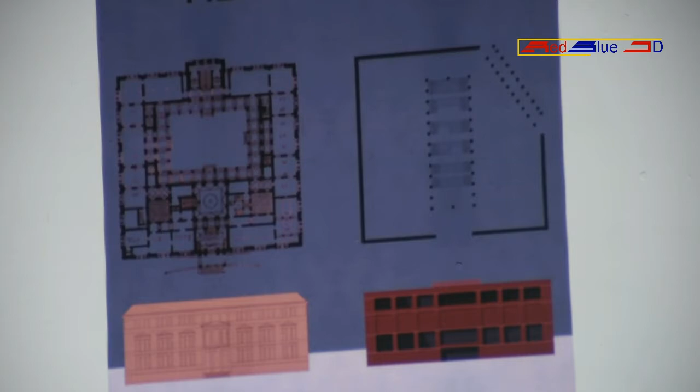So in terms of the urban context, we basically took this volume that the Martin Gropius gave us, and we copied this volume, except on this side because there's a street, so we'll talk about that later. You can see that in terms of the volume, the facade, and also the axis, we buddied up with this other building.

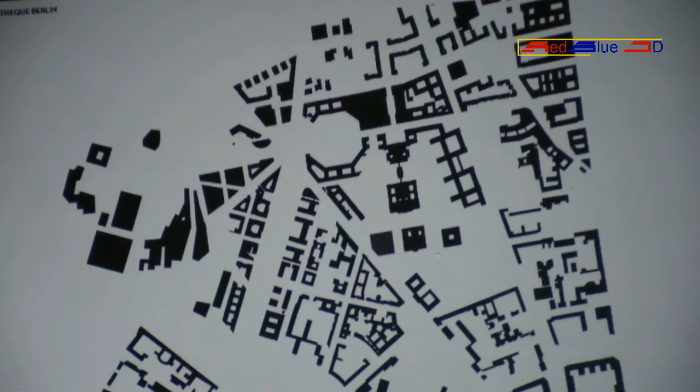So you can see it here, like in the plan. It was gray, but the little thing really in the middle, the kind of grayish purplish thing, that's our building. You can see that we took the axis that we had, and this other problem that we solved with that as well, because our plot has this triangle thing, which was also a challenge.

How do we handle that? Do we put a triangle? Do we make a front to that, or what do we do? So this is what we decided to do. We took the axis, we took the volume, we also took the height, so we really took the whole volume.

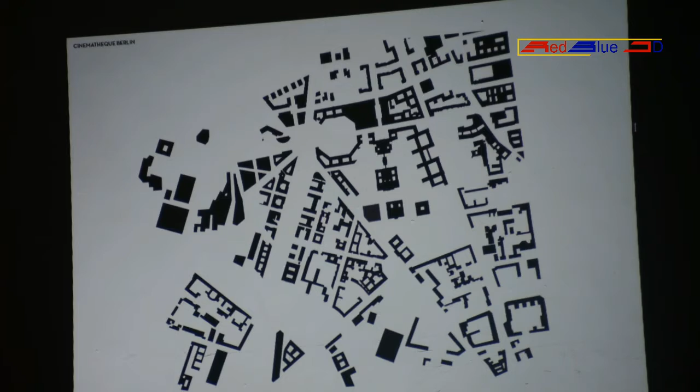And the only thing that happens is that the street kind of cuts our volume, so we had to react to that as well. I wonder if I should show the model first. So that's what it looks like when you go close.

In terms of what we had to bring together, this urban context, and then also the inner organization, with this huge hall that was inspiring us as a reference, we wanted to make that. It was given to us that we needed a foyer, and we said okay, we want to make this huge hall basically, and we put this huge hall in our building. How did we do this? What you can see here is that what you have in the columns is the hall.

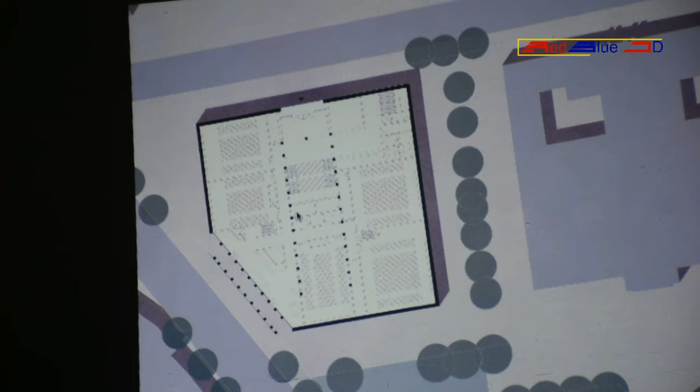I don't know, can you see some? I think I will explain more later on as well. I'm actually thinking maybe I should show the model first, because I think it'll be easier. You can see I don't use a Mac, so I don't know how to do it, so I will show you first.

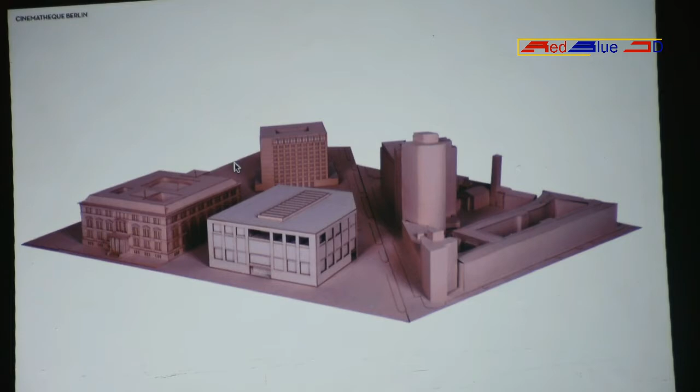So this is what it looks like from the outside. And then on the inside, okay, so we have the Martin Gropius, and this is our building, and you have a bit of the surroundings. And this is what it looks like, our hall on the inside.

So what we did basically is we took our building and we put this huge hall in it, and inside the hall we have this staircase, which does the circulation of all the different programs that are inside the building.

Actually, I didn't say what the program was. So the program was, you had a museum with exhibition space, you had office space. It was supposed to be also kind of temporary exposition space that can be turned into office space. And there's studios for the film students, and there was a restaurant, cafe, and museum shop. So really a lot of different things.

So for us it was like, okay, we have this foyer with the staircase that will organize these different programs and help bring it together. The staircase has small platforms, as you can see, which can be used to work, to exhibit things, and so on. You have small steps at the side, and in the middle bigger steps which are like to sit on, with platforms in between. So that was the idea.

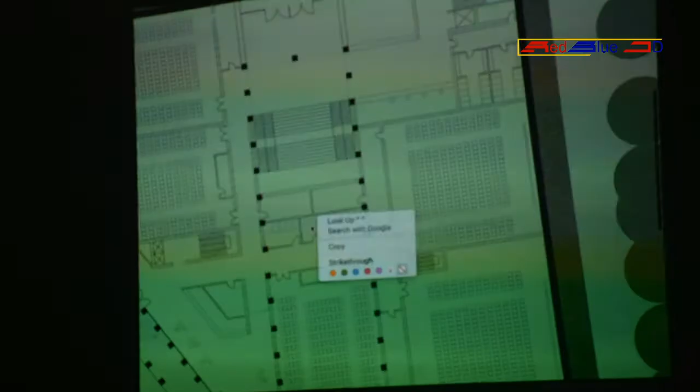So I will explain a bit more how this works. Can you see something? Kind of, right? Kind of.

So on the first floor you have the entrance, and then you have the hall where the staircase begins, and you have the whole cinema part, with these different auditoriums.

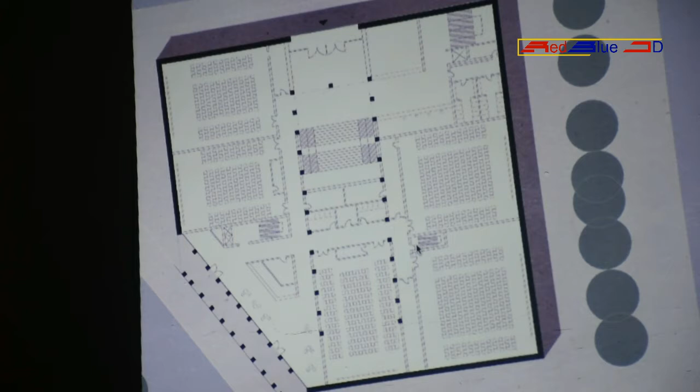I was talking about how we had to react to the street cutting our building. So what we did was, on this side we have another entrance, a smaller entrance for just the cinema part, because that might work also at night when the museum is closed, when the offices are closed. You have this kind of arcade that you can pass through to access the cinema part. That's all organized in this part, and also, as you'll see in the section, we put it into the floor a little bit because the cinema part needs a lot of height, and we didn't want to go higher than our neighbor.

So the neighbor was 23 meters, and we could not go on top of that. But at the same time, we needed to put a lot of stuff, and the museum space also had to be pretty high. So we solved this by really putting the cinema at the bottom and putting it slightly underground.

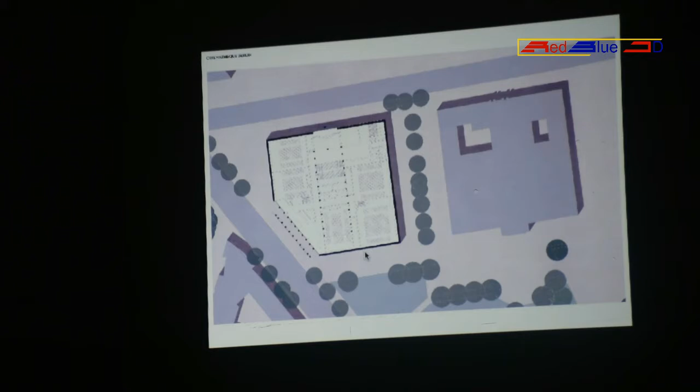Yeah, I'm really too stupid for this thing. There we go. Sorry.

So you can see I left it in German, I'm very sorry. You can see the other floors. Each time in the middle you have the staircase, and around it you organize the different programs.

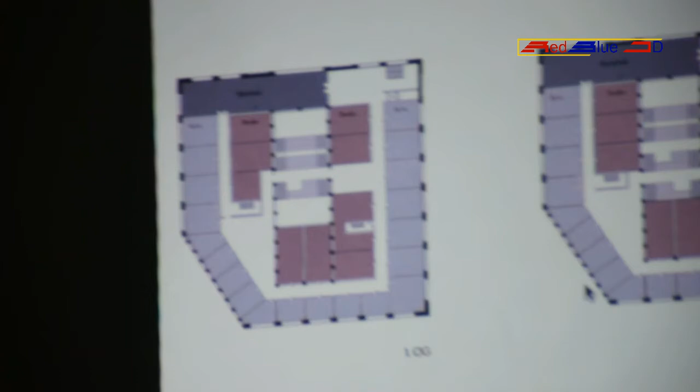So in this case again, we had the thing with the light: all the office space is around the facade because you need a lot of light there. Then in the middle you have the studios on the first and second floor, so there's two. The studios get some indirect light from the hall, but they don't have a facade. There's also a small library which goes over 2 levels. Then on the 3rd and 4th floor you have the exhibition space.

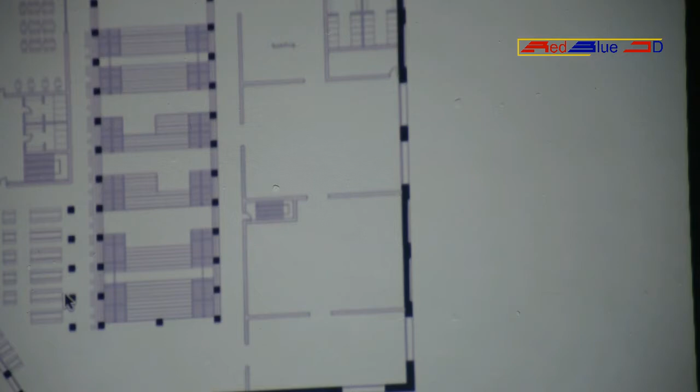That's here on the right. In this one, you can see this is the 4th floor, also the exhibition space on the right. On the left there's a cafe and a small restaurant, and they have a terrace—the restaurant has a terrace. You can also see the staircase in the middle, with this kind of gallery around the hallway.

I think you can see it in the section that this is our hall—you can kind of imagine the construction now with the grid. On this side it's very light, but you can see the projection wall. On the other side you have the staircase that you can sit on. You can also see that the cinema part is put into the ground, with different levels.

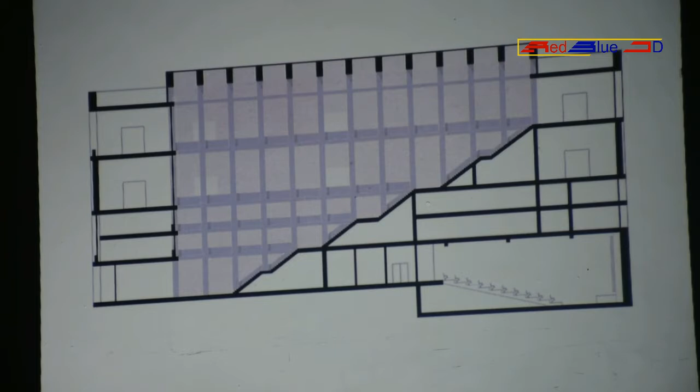So the first 2 floors are low, and the other floors are really high because the exhibition space had to be at least 6 meters high for exhibiting.

What I can show you here as well is that we put this grid underneath to organize things, and you'll see later in the facade too—basically we have 2 grids.

We have one for the facade and the outside, which is bigger, and then a smaller one in the hall, which is half of the big one, where the columns go up—where we have our cafe, and down on the ground floor you have the entrance for the cinema. You can see the grid is kind of going out, pushing out to the facade, because the idea was that since you cut our volume, you cut our facade, here you have the inside kind of coming to the outside.

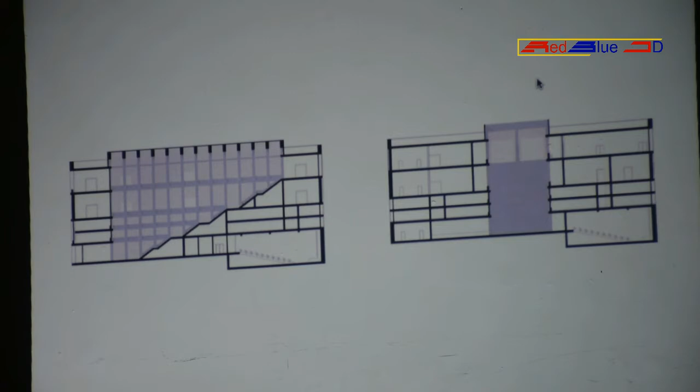So you can see the hall, and you can also see it from the outside because it's higher, like this little lantern coming out. I'm really sad I don't have the model, because I think it looks a lot nicer. But it's really orange.

This is the facade that we came up with. So you can see the grid, the big grid and the small grid, and you can also see the lantern of the hall coming out.

And you can see that where the cinemas are, it's kind of closed, because you don't need windows there, right? So you have this kind of base. That was another thing that was important to us, that we have this heavy volume - we want to give it something at the bottom, like a base to be on.

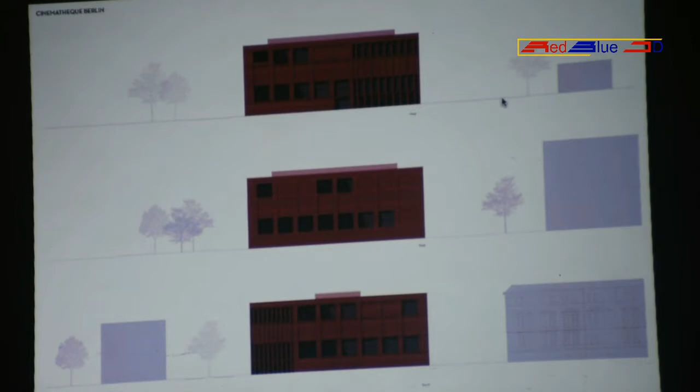And I will also show you how it's really inspired from this neighboring building again. It's a brick facade. Maybe we can show you best here. I cannot see that well, right? Can you see the lines on the left building? It's too small, no?

So this is the Martin Gropius building, and we tried to, like I said, we kind of copied, or we got inspired by it. You see, he has this base, and he has also these things that go around - in English, I'm not sure what you call that. So we took those; they are where our floor levels are, our ceilings basically, that are on the outside. And you can also see that the proportion of the windows and the entrance are the same - that it has a little bit more space on the side than between the windows. So we really studied the proportion of this and tried to learn from it.

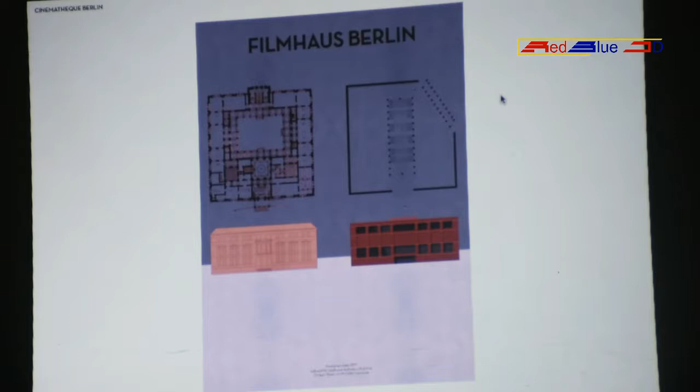Maybe here you can also see that we tried to do that. We have these fields that the lines basically made, and we either had windows, or we had blind windows that are pushed back a bit, but they're not a window, just a brick facade.

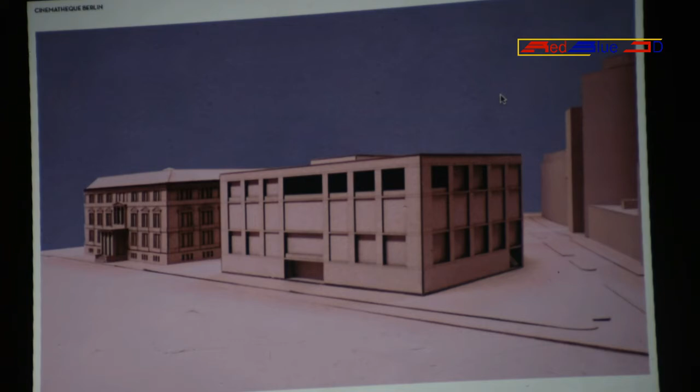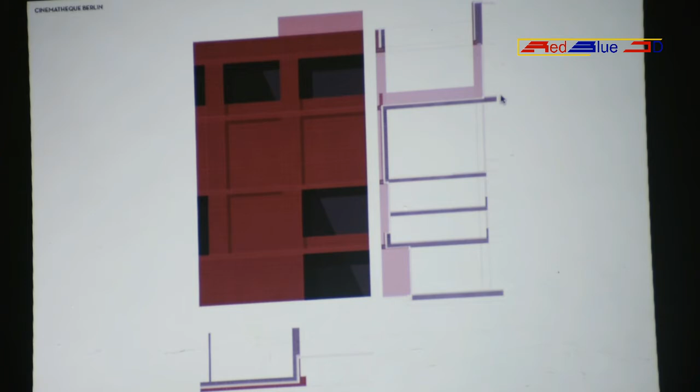You can see here, maybe again the model, which is where the photos come from. This is the model that we had, so that we could kind of open up the hall, and up there you can see how we were building it, up and up. This is just how the facade works - it was a double layer, basically. We had inside the structural part, the ventilation layer, and then the brick facade, which was not structural.

I think I talked a lot. Maybe you have questions, I hope I explained more or less. Yeah, thank you.

Is this a construction detail? Maybe we cannot see it properly. I think it's not that clear, but I can zoom in a little bit. It's just the structural part, and then the insulation - the concrete structure with the brick cladding. So exactly, it's just the darkest part that is structural.

So the year of construction of the building beside it is around 1,400? Yeah, something like that. So the project is beside a very old historical building that is 600 years old. A lot of the time, when you design in context like that, you have to be very aware of the responsibility of the new design and how it's going to relate with the context.

Do you have questions? Thank you for the presentation. Also, as she said, it's a nice approach to managed to harmonize the historical building and the design course. Most of the time it becomes challenging for students to adopt a modern design, and when you are designing in that context, it's a good approach how you manage to be in harmony with it. And go back on the plan with the context. Site plan. Site plan. This one. No.

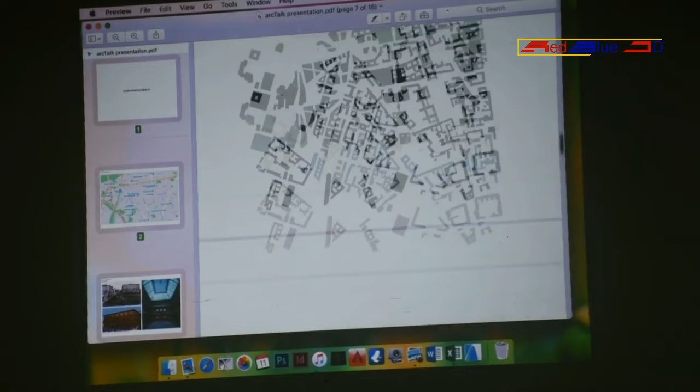This one, the site plan. How do I put it back in the slide? I'm just checking for you. To make it big, you want to have it. I think also the brightness. You meant this page, right? So it's like the plan, your plan with the context.

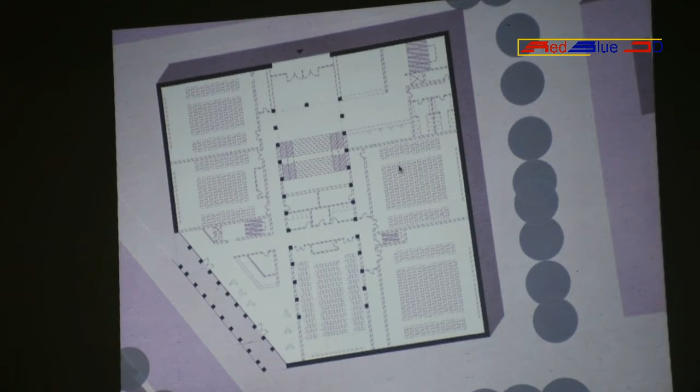This one? Yeah, the plan. My question is about the corridor with the trees. Is the facade totally closed, or is there a connection between the buildings? It seems like there is somehow that corridor, whether it's closed, the facade.

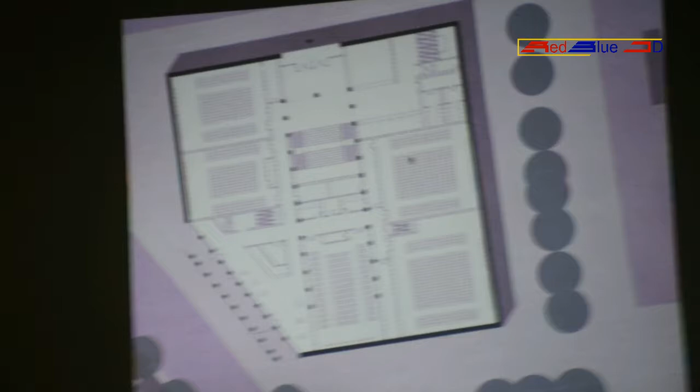The facade is closed on the first floor and the ground floor, yes, it's closed except for this part facing the street, the diagonal part. On the ground floor we have just the cinemas, the auditoriums, which have to be dark. They don't have windows, and that's the space we wanted to have, and our historical neighbor also has that kind of space. So on the ground floor it's completely closed, but on the other levels it has openings.

In my opinion, another way you could connect maybe by visual connection your building to the next one, because if it's a historical building, you can profit from it. You mean you would like to have a visual connection to the historical building? Yeah, I think that was something we also thought about.

Like I said, I think you have it on some of the upper levels, but we decided not to go that close to it. We decided to have some distance from it. But I understand that you would want to look at it.

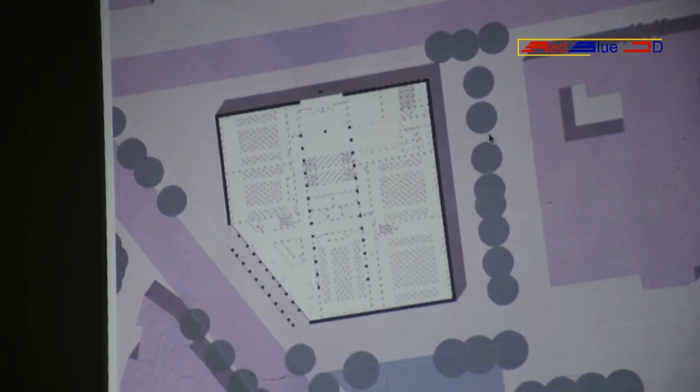Another interesting thing about this building, you can't really see it well, but this building was destroyed at some point, I think in the First World War, and then it was renovated. The really beautiful, decorated, ornamented part is the front and one of the sides, but on the back and the other side they didn't redo it anymore because it was too expensive, so they just kind of did the front facade.

That's why we decided to have our entrance on the side, because we also thought maybe you could enter from the back, or create some room between the two buildings, like an outside space you could use. But we decided not to do it because it didn't seem appropriate. We preferred to have these two buildings really next to each other from the front, but that's definitely also an approach you could use.

I need to know more about how you ventilated the building. How ventilated the building? I didn't think so much about it, to be honest. Well, I mean, you have openings, but yeah, we didn't fully address that.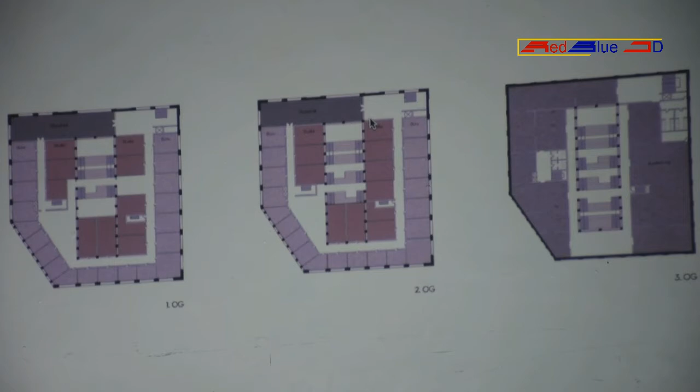I think the idea was that the foyer, the hall, is the thing that brings everyone together. It can be used by everyone. We actually have some secondary staircases as well, but more for emergency, and also so that you can use the spaces separately. But we really wanted all the stuff organized around and circulated by this big hall. Did I answer the question, more or less?

I don't really understand the plan with the color, the dark gray of the 3rd floor. That's the exhibition space. Yeah, maybe the plan's a bit confusing because this is the 1st, 2nd, and 3rd, and then that's the 4th floor. It was the bigger one, so we made this one to more detail. Our example floor was the top one.

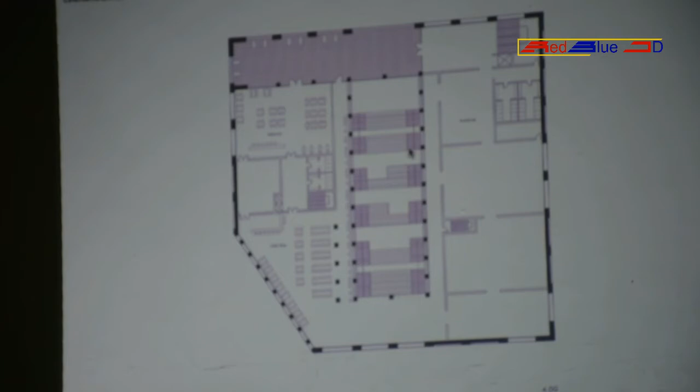What is the neighboring building? What material do you use, concrete or brick? Different things — we had a lot of different buildings around, but they were all a bit further away, like across the streets. Different things, concrete buildings, a lot of glass as well, office buildings. There was another kind of historic building a bit further away, kind of...

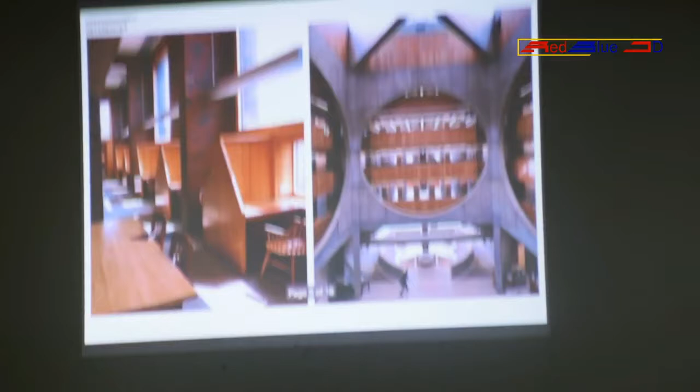Why did we decide to use the bricks in the middle of concrete? Well, we didn't think that the concrete was something so predominant that we needed to use concrete. I think one of the things is that we wanted this house to be beautiful and inviting. Of course, you can leave the concrete and it can be very beautiful, but I think it's not necessarily, especially in such a big building, such a big volume, something warm and inviting. So maybe that's one of the reasons why we chose the brick.

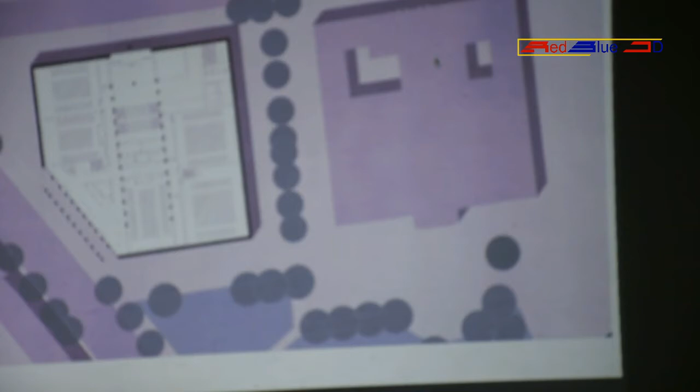The way you took it in context, so it doesn't escape the corners of the existing roads or any other buildings around — my question comes to the accessibility around the building. Can we go back to the section? The section, sorry. It seems the stairs are really one way, like a strip taking you to only one part across the building. How are the other parts going to be accessed?

You mean how do you access? The stairs are in the middle, and also they seem like they're one way, taking you to the other part. These parts on the side, how are they going to be accessed?

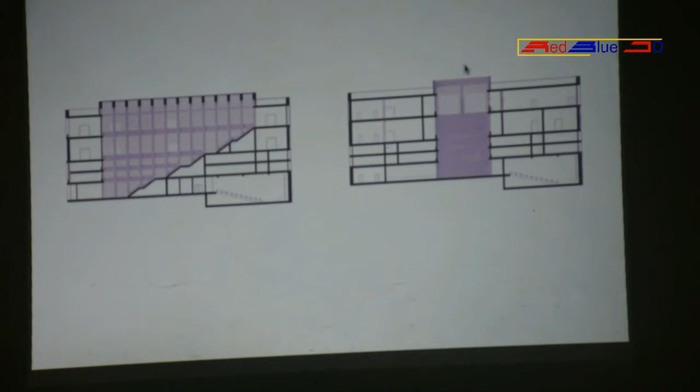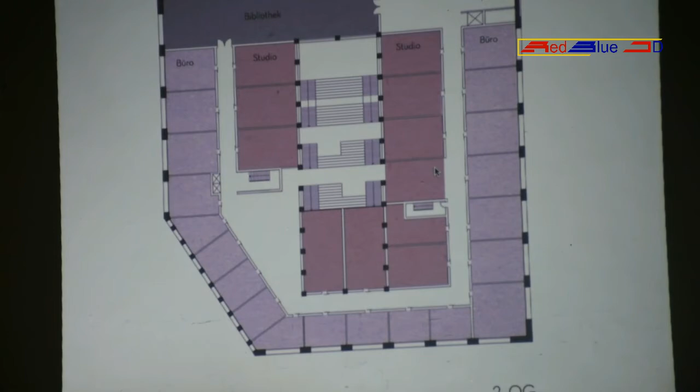You mean, for example, how you access this? Because it looks like... well, I think you can see in the other plans, for example here, what you saw there is the office. So you do access it. This is a mistake, by the way — this is not supposed to be red. So through the foyer, you access this, and then we tried a long time to not have a corridor because we didn't like it. But in the end, for the office space, we didn't get around having a corridor to do the horizontal circulation.

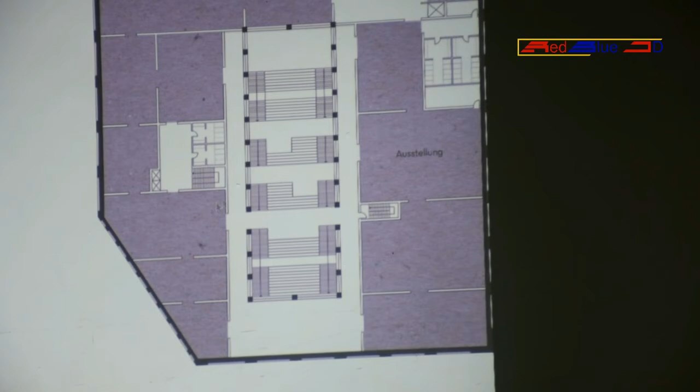So in this case, you access the floor, but then you have the horizontal circulation here. And in the case of the upper floors, you don't really have a corridor, more of a gallery that goes around the hall. So here you access the gallery, and then you can circulate around to the different exhibition spaces. Basically, each step, the landing between the steps, makes you access horizontally.

They showed a picture of that — even in the model you can see it. I think here they have galleries around on the top, and you can see where you access from the landing. Exactly — so here you access on the floors, and then here always on this.

I want to ask if you know the maximum number this can afford, and what about the car parks, because I found this building located in between other buildings.

The maximum number of people, you mean? Yes, you can go inside. Didn't calculate it. It has like 15,000 square meters. That was the program, so really big.

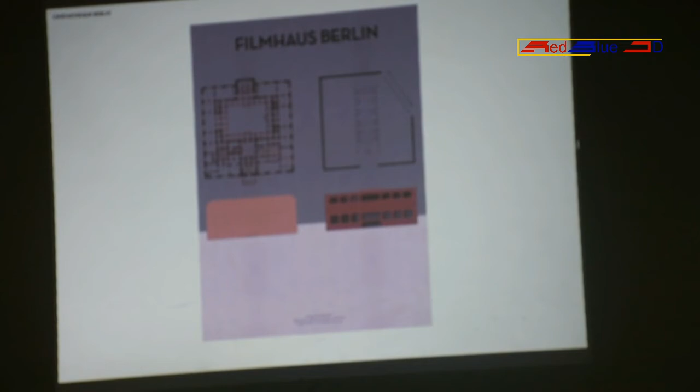I think the concept was also in a way... I'm missing the English word. Anyway, part of the concept was to buddy up with this neighboring historic building, to copy a bit from it and see what we could use for it. I think we put the footprint of that building here as well, with the exhibition space. The thing is, while we tried to learn from it in some parts, we weren't going to do the exact same building. We tried to interpret some things we found, but we also interpreted things from other references, like the Tate Modern Hall, and other things.

The concept—what part of the concept? For them it's very difficult to understand the approach because here we have a really American imprint. In American schools, normally you start with a concept design that is very abstract and try to apply it to the design. In this case, which is typical of European universities and also my background, instead you normally start from the context and pick elements of it that give you the concept. So it's not abstract. That's why the concept here is deeply related to the existing building beside it—its proportion, height, footprint, and relation to the urban environment. It's not something abstract. We normally choose abstract concepts like porosity, because that's how the curriculum of this university is based, more American.